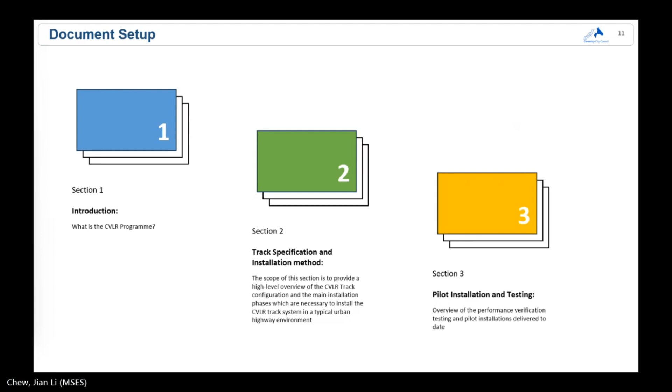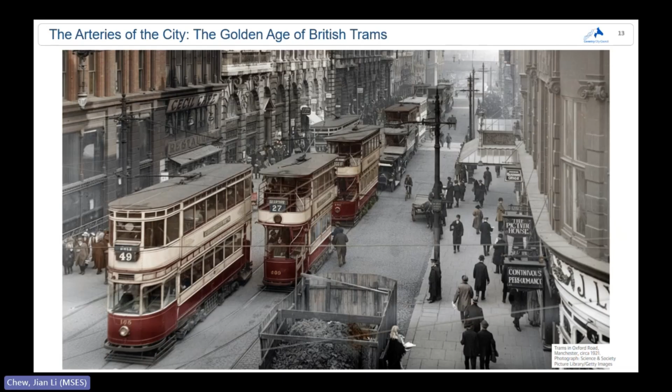Trams, believe it or not, are what probably created modern cities. It's what used to move people around in cities, and the UK really was at the heart of this innovation. Cities wouldn't have come to exist with their nature if we weren't able to move people efficiently around. Trams were at the heart of public transit. Cities were never designed for cars, and that's part of the problem we have today.

Excellent. No, I think I prefer to do it.

So what is the situation we find ourselves in today? Light rail in Germany, because it's retained most of its systems, has about 60 networks left around the country. France have been building aggressively, they've got about 30 networks. The UK, depending which ones you count as light rail, has up to 9 systems left. And unless something changes, we've just seen before Christmas that Leeds, the biggest city in Europe without a light rail system, is probably looking at years and years before they get one. We'll look at the reasons for this situation.

Just to give you an idea: if we look at Germany, those 60 networks moved about 4 billion passenger journeys in 2024. That's 11 million people that travel on such transit.

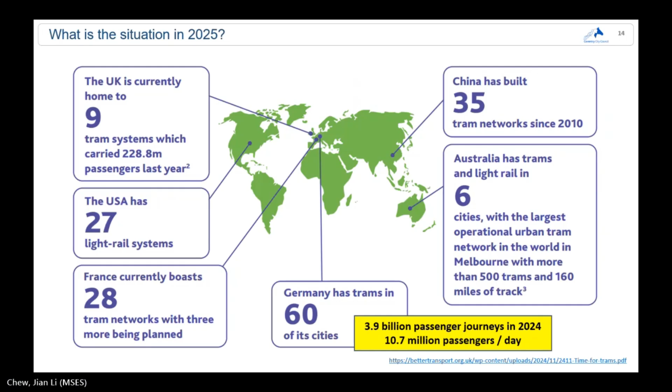So, to summarize the last point, the UK is really way behind other European countries and cities in terms of its light rail adoption. There's no other way of looking at it.

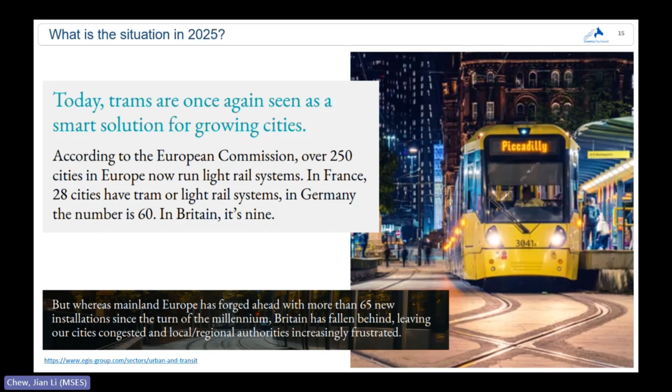Coventry had trams, as you might be aware, as did most other UK cities, but it lost them, partly because of the war, but more than the war - and I'm not speaking just specifically about Coventry - most other tram networks were abandoned purposefully, and it's not because the people didn't want them. The last tram to close in Glasgow had about 250,000 people in the streets celebrating the last tram journeys. So people always loved these modes of transit, and they still do.

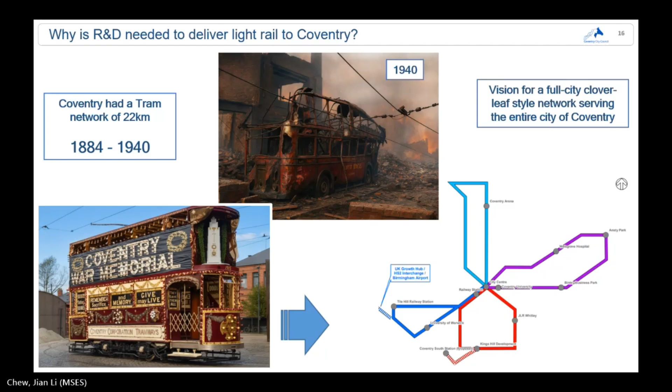Why are we trying to achieve this? We strongly believe, and this is backed by science and evidence, that a light rail implementation in a city can really bring significant advantages. When delivered in the right way, it's been proven over and over that it can really drive economic regeneration - the government invests X, private industry brings multiple factors of that. We've seen over and over that wherever light rail gets implemented, property around it increases in value more than anywhere else in that city.

In terms of performance, nothing comes close. It's zero local emissions and real zero emissions - well, nothing is truly zero emissions, but compared to a bus, it doesn't suffer from tire emissions. And of course, you're putting a lot of people on one single vehicle - by its definition, it is sustainable.

The final aspect is that when designed right, trams can really transform city centers and transport corridors because they are gentle vehicles. They are repeatable - you always know where a tram is. Seeing a tram come your way isn't like seeing a bus or a lorry coming your way. The certainty of steel on steel gives you the confidence that you always know where that vehicle is. That's why you see people walking in front of trams in cities, because that repeatability of motion and smoothness gives people confidence in being able to live very close to them.

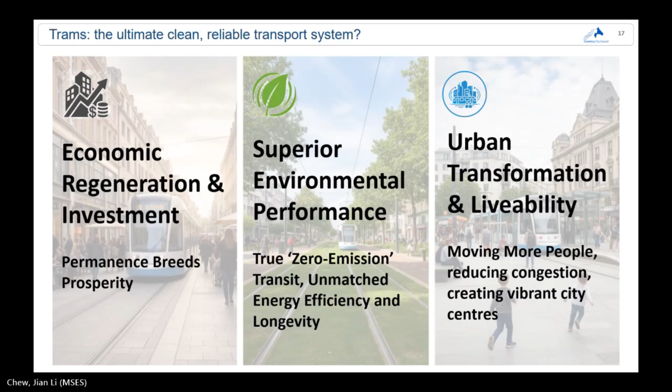So that's the vision, right? What has Coventry been up to?

Coventry has set up this project, and it's been quite a unique collaboration where government, academia, and industry have come together in a real collaborative fashion. I put that figure there, 30 million - it's expired. We've created more than 50 million pounds of research in this project, including this last phase.

And it must be said that funding is not Coventry's council tax. It's all R&D funding that we have been able to achieve step by step, very painfully, but it's reality. And this is by no means an exhaustive list of partners.

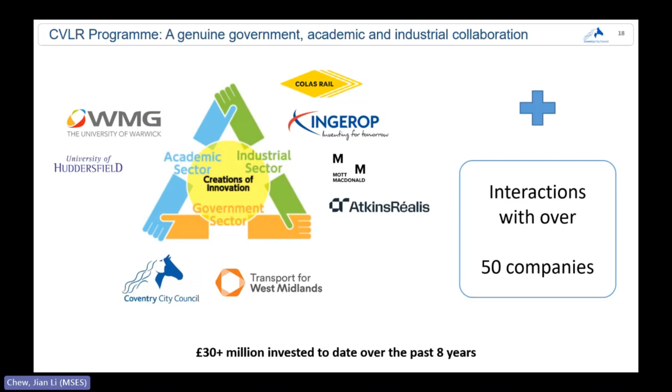I myself was one of the lead researchers at WMG to start with, and since then I've moved working directly at the Coventry City Council. Colas, Ingerop, Mott MacDonald, Atkins have been a few of our key partners, but in reality, and particularly on the track project, this program would have never existed if it weren't for so much collaborative and a lot of in-kind help that I've got from more than 50 companies that have supported and believe in this program.

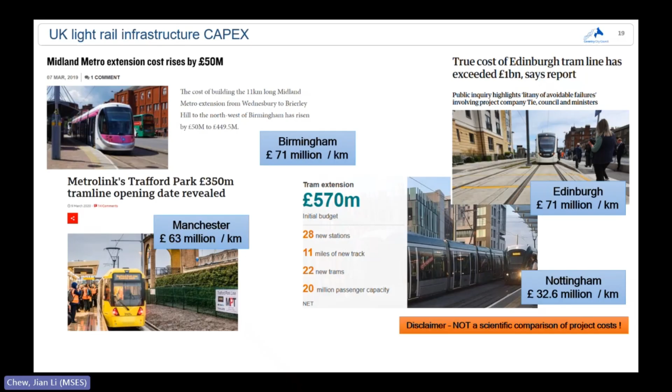And then there's another aspect to it. In the UK, there is this very aggressive push by the government and belief that they want these projects, these public transit projects - where most of them in Europe are delivered for the benefit of the people - so they are public investments for the people.

In our case, we want these projects to be self-sustainable in terms of the investment, right? We want them to have really solid business cases. And if anybody of you has been involved in these business cases, they are quite perverse in the way they are set up.

Just to give you an idea, right? If I'm building a business case for this light rail, and we're intentionally diverting traffic because we want to give priority to a more sustainable mode of transit, in my business case, I need to account for the delays I'm causing the traffic I'm intentionally diverting. And that's just one example, right?

On the other hand, we never account in the business case for the damage that private cars or so on actually cause on us, right? So it's a real fake business case because it doesn't account for all of these real factors, right? Nobody accounts for how many people we send to the NHS because of pollution, right? So that's why this business case is a fallacy in the end, right?

But without these business cases, these projects cannot exist because you're never gonna get funding for such projects. So that's the reality we live in, right?

Coventry City Council had been doing a lot of studies looking at what could make sense. And this is a number, and probably it was an aspirational challenge that they've given us as researchers at the university. They told us we could put together a business case for this early rough route that we have in mind. But it could only actually work if we have something that costs 10 million a kilometer.

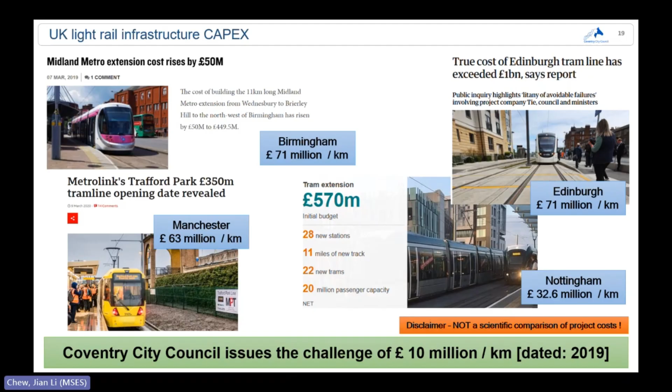How much does concrete cost, right? How much does asphalt cost? Why on earth are we spending 70 million a kilometer? Does track actually cost 70 million a kilometer? What's the cost of a tram? A tram is 2 million, 3 million. So why on earth are we costing these hundreds of millions on a project?

So that's where it started. And I guess the realization I came to is that track really is neither slow nor that expensive. By that I mean, you could probably build high-speed rail track at about 3-4 million a kilometer. That's the actual cost of track, of the final what we call the superstructure.

And in terms of speeds you can achieve, you can look that up. This was one of the biggest European-wide research projects in rail. Those are the rates you could achieve - 150, 500 meters a day.

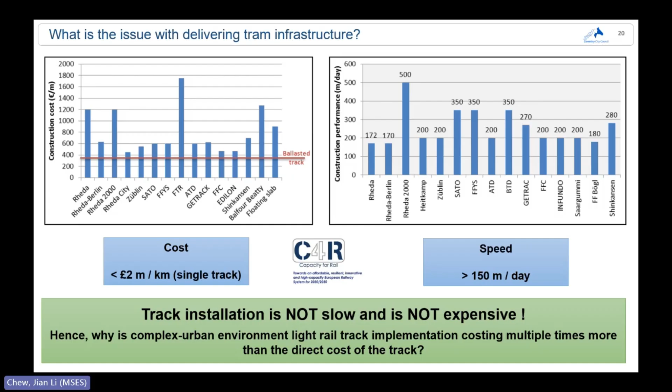But we all know that we close city centers for years when we are delivering track. So what's happening? I think you've already figured it out - it's not the track infrastructure which is the challenge. It is all of the enabling works necessary to put track into the real world. It's very obvious once you start looking at the numbers. Essentially, this gives the foundation to our project.

So we started to put some numbers around that. Manchester Metrolink: 400 separate utility assets had to be moved for just 1.3 kilometers of route. Those are 400 projects, all with their own complexity, costs and challenges. Plus, they are all interfacing with each other.

If we look at Edinburgh, you all know about the problems there. Edinburgh was approved by Parliament at about 350 million. It ended up costing more than £1 billion, for half of the scope, half of the route. Most of that was because of the complexity they met when they started digging and dealing with utilities. In Birmingham, 16 million a kilometer in that last section was just the cost of utility diversions. And that's actually net - it's not the real, full cost related to utility diversions and other enabling works. The number is even bigger than that.

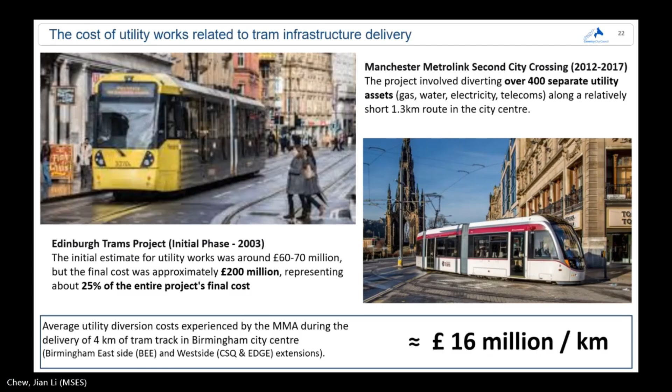And so this is what CVLR is all about. It is a journey, an R&D project to try to look at things differently. The industry is completely focused on subcomponents most of the time. It's completely fragmented and very niche in a lot of areas. So there's a few sleeper manufacturers, a few fastener manufacturers, a few engineering consultancies putting these together. Nobody actually has the holistic control or ownership of a full track system. Very, very few parties exist with that nature.

And if you would decide as a private entity to embark on a journey of developing a whole new system on your own, well, not a lot of people have done that and succeeded. There's a lot of R&D projects which stay there. So CVLR set out not on coming up with something better than what exists - we are never going to be better than somebody who has been doing something for 100 years. They're experts in that field.

But the aim of CVLR was to look at the real costs behind these light rail projects. The costs come from earthworks, from utilities, and the complexity that these bring about, the massive project durations we deal with. So CVLR track was designed from the ground up to try to give us a system which deals with the costs in that area. Does that make sense?

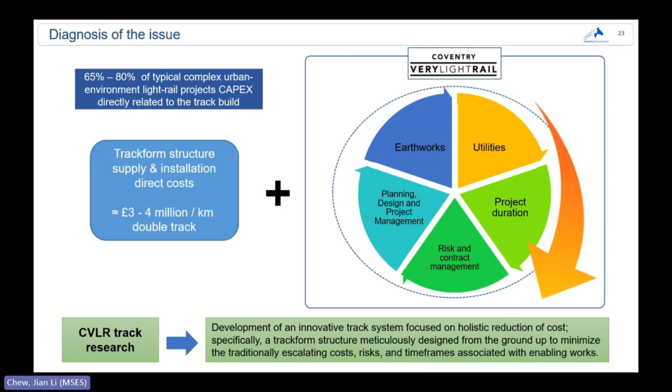So to go into a bit more detail on how we set about trying to achieve this vision, and then start going from vision to engineering, we essentially set up these targets for ourselves. We did set up a full program about coming up with a new vehicle, and I'm just going to touch on 2-3 slides on that today. The vehicle is a key enabler, and also we have to keep in mind that a lot of these decisions were taken in 2016, 2017.

The world is a very different place, and in a lot of ways, actually, the market is following our vision from back then. So some things are becoming easier than they were before, because battery technology, for example, is so much better than it was in 2017.

So the tram itself, it's a key enabler. As I'll explain, two of the main advantages that we sought to extract from the vehicle are mostly because of its onboard energy. If the vehicle doesn't, if I, as the infrastructure engineer, don't need to provide energy to the tram via the typical catenary, then of course the simplifications are very obvious. We don't have to build all of the overhead catenary. And also, for us track engineers, we do not have to deal with stray currents, which is a massive issue with typical light rail. I'll show a bit more on that.

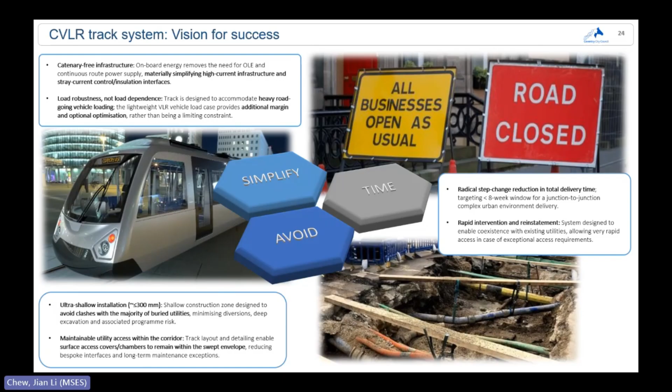As I mentioned, today isn't really about the vehicle, but just to give you a snapshot, that's the vehicle. Again, the project looks at trying to extract advances in technology, mostly happening within the automotive world, and bring them over to the light rail industry. By that, I mean two key technologies which we are really exploiting.

One is battery technology, and the other one is autonomous driving, autonomous control technologies. A light rail project, the light rail industry would have never had the capacity to innovate in these areas and actually drive these technologies forward on its own. But of course, billions are being put into these technologies by the automotive world, and we can carry over those technologies.

Such a sized tram could never actually exist economically if you are depending on drivers. It's the reason why you see double-deck buses driving empty all day, but we still keep buying double-decker buses, because the driver cost is such a significant aspect of OPEX that it makes much more sense, unfortunately, to pay 30% more fuel and buy buses which cost probably double when comparing a double to a single-deck bus. But because we fill it in rush hour, it still makes economical sense to do it that way.

And same thing with trams. If you look at the average occupancy of trams around the UK, you're talking about 25% if you look at the full data - how many seats we have on all the journeys and how many seats are we filling? 25-30%. That means we're packing trams in rush hour and they're running empty the rest of the day. But it still makes sense to have that model because of the driver cost. I'm simplifying some aspects - nothing is black and white in the world, but that is my understanding of it.

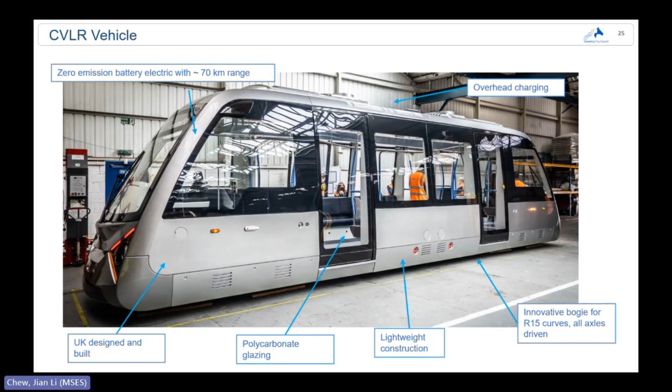The other aspect is onboard battery. As you see, that vehicle doesn't need any catenary. It's 8-year-old technology, and with a battery the size of a Nissan Leaf, we can do 70 kilometers of running. So why on earth would you need to put in catenary? And that's 8-year-old battery technology - we're not talking about what is available today.

So that's the vehicle.

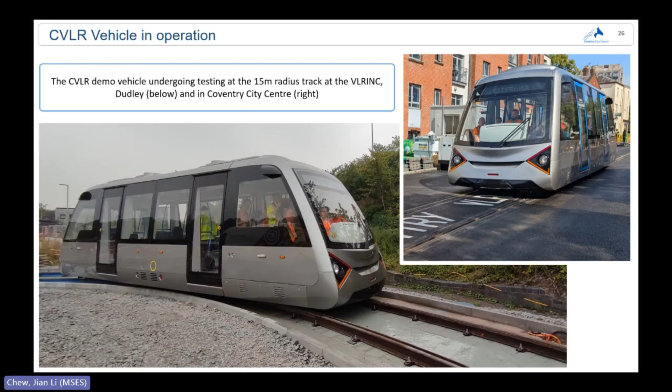For the project managers amongst yourselves, I thought I'll give you a snapshot of this, because this project - unfortunately it wasn't the case that we had a very rich councillor who stole, I don't know, 10 years of council tax and came to us and said make me a tram. This has all been very, very hard-fought funding, which we got step by step from the DFT. And the only way we were able to achieve this amount of funding is because we had to build a lot of stage gates into our process. DFT itself did not know how to deal with our project because of the level of funding available here.

The only way we were able to do this is - of course this is our vision, but we're going to deliver this success first. If we achieve that, we'll move to the next. The only challenge with that, of course, is that in itself requires a lot of work. Every stage gate requires a lot of work just to be able to pass, and it of course hinders how you can build collaborations, especially with industry. People would be willing to invest, but if you only promise them the project will only exist for the next 3 months or 6 months, well, people reconsider if they're going to come along with the journey.

It would have been a very, very different picture if at the very start the UK government put the money in a pot and let us use it. This project would have probably been shrunk into half the duration and probably delivered more. But it's the reality of the world we live in. We started with very, very little money back in 2017, 18. And that period was essentially going through this story, which I have been telling you. We really wanted to convince ourselves that we had a strong foundation upon which to build.

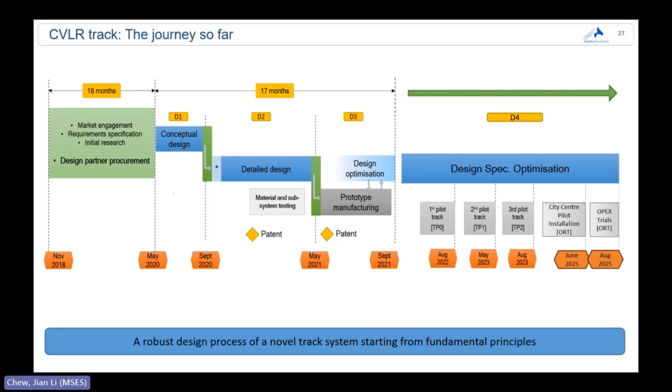September 10, 2021 is when we delivered the first full-scale prototype demonstrator of the system, which convinced the DFT to really invest some significant money into the project to allow us to start building the first pilot projects. Since then, we have delivered 4 pilot projects, and I'll give you an overview of these and the reason why we had to build so many and the incremental learning we took from one to the other.

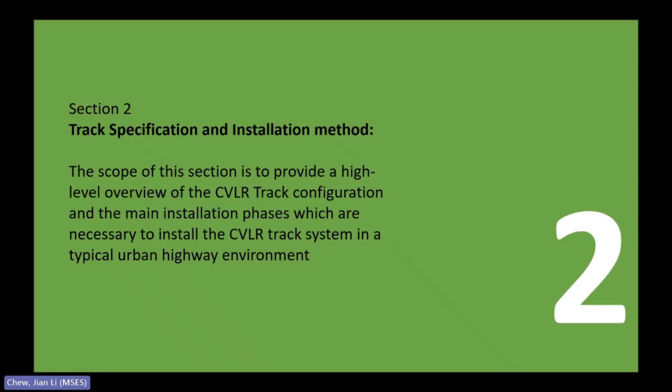So that's the first section done. We're going to look at the system now and the testing as I've been highlighting.

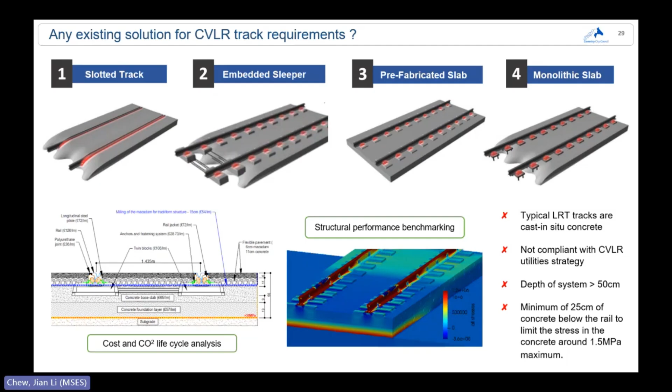The first thing we did, we really wanted to make sure there isn't any obvious solution out there we can actually exploit. Why redesign the wheel? So we embarked on a journey of benchmarking. We built up FE models, cost models, carbon models, comparing basically every track configuration we could get our hands on - the classical one, embedded sleepers, slab-based track systems, cast-in-situ systems, top-down, bottom-up, and so on. The sad answer was that none of the existing track configurations gave us what we needed.

This is what a traditional track looks like, especially the depth. No project is alike, and no section of a project is alike, but this is what we're typically dealing with. The top bit, the last 150 for the rail, and 250 millimeters roughly underneath it is the main structural element. But then we typically need - and that blue arrow requirement, which comes with the vast majority of track specifications, is the biggest headache - they require a foundation having 120 megapascals, for the engineers amongst yourselves. And that property never exists in our roads when you dig to that level, or at least you cannot assume you're going to find it, which is even worse.

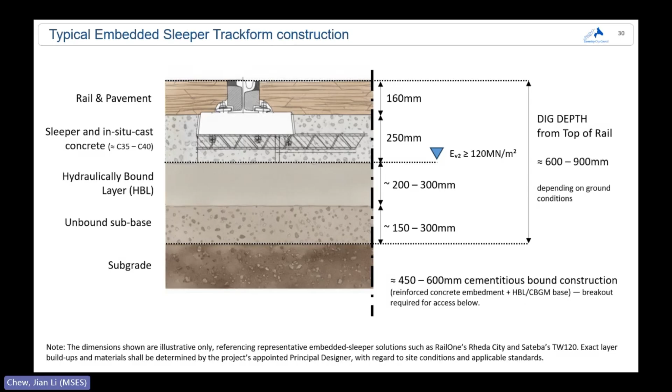This is what we might call the state of the art in track construction looks like. You have to set up a clean foundation which achieves that specification I've just shown. Then on top of that, in an urban environment, we typically put sleepers. Why sleepers and not slab-based like high-speed rail? Because sleepers allow you to have continuously changing alignment - with slabs, it becomes much more challenging. You put the sleepers, align your rail, and then pour the main structural slab, which ties all of those sleepers together, and that's your main track constructed.

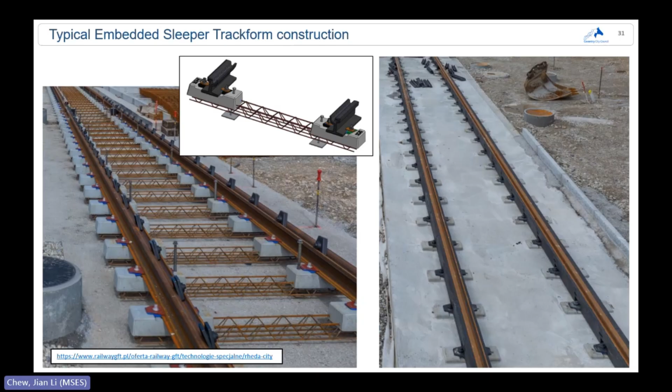What are we doing differently on CVLR? These are requirements which are quite unique to our project. If you would go around and ask Birmingham, Edinburgh, etc. for their track specifications, these requirements wouldn't exist. They would never have a requirement that the track system must only be 30 centimeters in height. Why would you create such a constraint for yourselves, unless you're in a tunnel and cannot be higher than that because the systems won't fit? But for Coventry, that's probably one of our most important requirements - we defined that 30 centimeters to solve the issues I had been highlighting before.

We did look at the rail. We did think about trying to come up with our own Coventry rail, but that on its own would have been a much bigger project than the funding and resource I had available, so we had to leave that alone and just use standard rail. Could we have come up with our own unique shape? Maybe, probably, but we just don't have the funds to deal with that size of project, and all the logistics and supply chain issues that come with having your own profile, which you'd have to roll and stock. That meant I had 10 centimeters of depth to play with - if you take 30 centimeters, remove tolerance for real world buildability, and remove 150 mil for your rail, you're left with 10 centimeters for your structure.

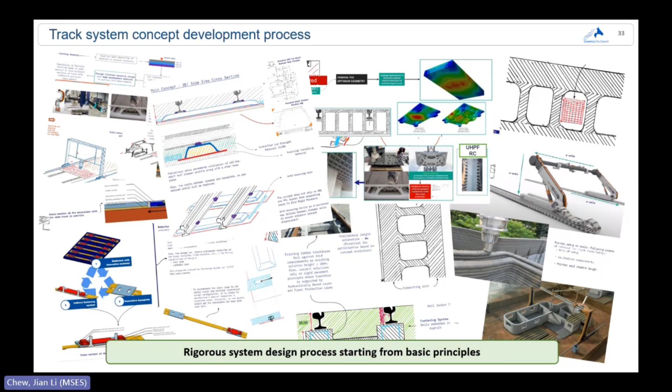This was probably one of the most fun bits of the project. We really wanted to avoid coming to a room like today and somebody telling me, 'Did you think of this?' We wanted to make sure we tried to think of anything and everything and explore these ideas. We looked at carbon fibers, aluminum sandwich panels, 3D printing on site, and so on. We built a very detailed decision-making matrix, which all stakeholders signed off on before we started, so we could properly value these concepts.

And what we came up with was this. I'll jump through these technical slides because photos will make a lot more sense. You could compare the existing state-of-the-art track to what we came up with - essentially a 300 mil realistic system. I say that because it's actually only 260 millimeters for the track itself; we left another 40 mil as real wear tolerance. So the slab is 105 mil, the rail is 155, and then 40 millimeters for a bedding layer.

As you see there, in the absolute perfect world, which we engineers love to work with on computers, you see where the utilities are. They're very far from our track. In reality, of course, it's not always the case. But that's all to scale, and that's where utilities should be. Telecoms should be at 450 mil or deeper.

Electricity can be at 520 mil, and gas should be at 750 mil in the highway. And so that's where the 300 mil came from, right? That's a requirement which we made up. It's something I decided on back in 2018, to give us at least a space to work in, and as healthy a distance as possible from where utilities shouldn't really be. We know that especially for telecoms, they can be much shallower than that. Nobody's controlling where these people are putting their utilities, and it's very common to have utilities which are shallower than that.

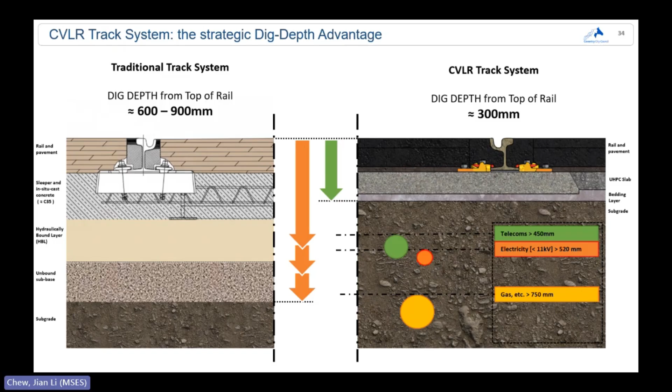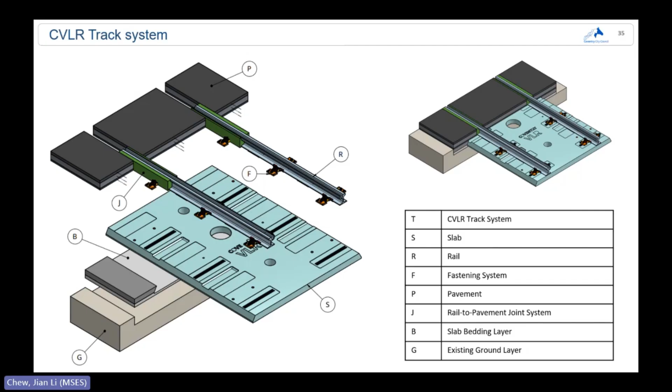But there are options, especially for telecoms when they're shallow. We can very easily slew and lower. That's the system that we came up with, and instead of trying to explain this technical drawing here, I'll explain the elements in the next slides. The main structural element is a slab, which fastens the rail to it. So we have a mechanically fastened rail, beyond it being embedded in the pavement, which sits on a bedding layer on top of whatever ground we find at 300 millimeters.

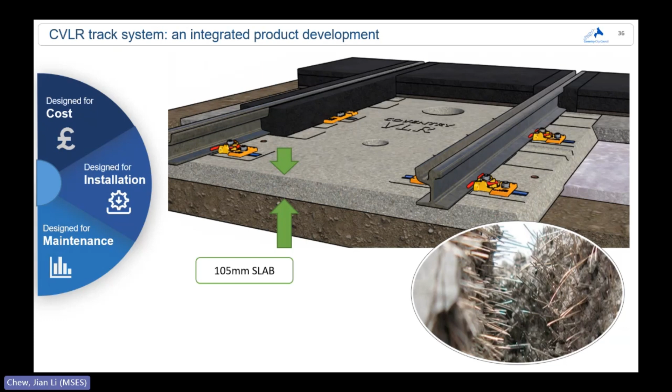That's another angle of the track. And what you see there is a section of the slab, and I put that on purpose. So how do you achieve a slab which is just 105 millimeters? We could only achieve the requirements we needed by using a class of concrete termed ultra high performance concrete. Has anybody come across or used it before? There's only one nodding, and there's a reason for that.

We are really behind the curve in the UK when it comes to the utilization of UHPC. Of course, UHPC isn't a brand, it's a family of products, and its performance can vary greatly, as you see there. Its elements are nothing special, there's nothing miraculous about the product. It's a cement-based concrete, we've got aggregates and filling powders.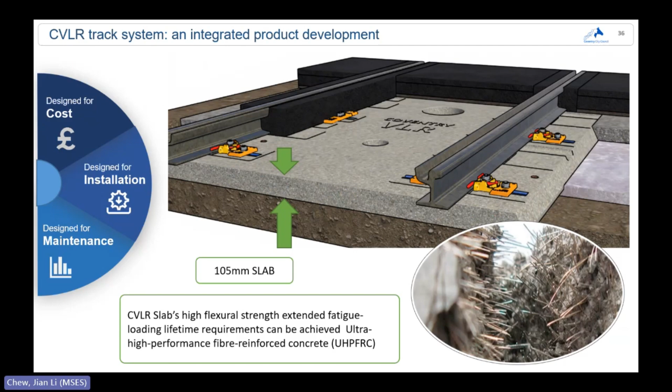What is unique is the use of these very fine steel fibers. If I go back to that image, you could see those steel fibers, 0.2 mil in diameter. It's what gives the flexural strength and ductility to these materials. Comparing it to concrete, you could see on that chart we're talking about compressive strength of 150 megapascals and above, compared to your classical 30, 40, 50 megapascals of products.

Yes, you said the diameter is 0.2 mil? Yes, needles. I've got a lot of holes in my fingers from handling them, yes.

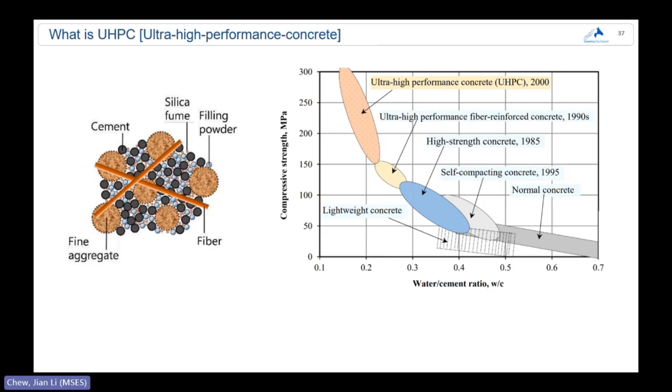Another aspect: it does use double the cement of normal concrete, which means if you look at a ton of UHPC compared to a ton of normal concrete, we're probably doubling the like-for-like comparison in terms of sustainability of the product. It's got a lot of cement in it and a lot of steel in it. But the truth is we're using a lot less material. So even when we compare like for like in terms of net material usage, we still end up with a sustainable answer.

If you start taking into account the reduction in material handling and all of the lorries involved in digging and so on, we're currently working on a full sustainability analysis of the solution, but I'm pretty confident we'll come up with a very pleasant answer. That's one of the main conclusions: UHPC, when used in the right ways, is a magical, fascinating material.

Out of this project, just out of curiosity, HS2 has actually implemented UHPC. The parapet sections on the Colne Viaduct project are UHPC. It solved a massive, monstrous headache that they were having. And actually, that was a direct result of Coventry VLR. I was giving a lecture similar to this a few years back, and there was one of the chief engineers responsible for that project.

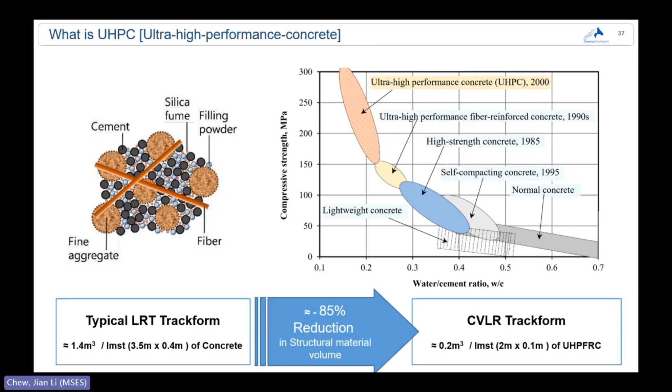I mentioned before the requirement we set on ourselves: we wanted a system that enables us, with very few slab shapes, to achieve essentially an alignment. And this is how we achieve it.

We have casting channels set in our slab, which means with one singular slab shape we could achieve basically any alignment, because of the variation of either rotating the slab by slewing them a bit, shifting them, or cutting a section of the slab.

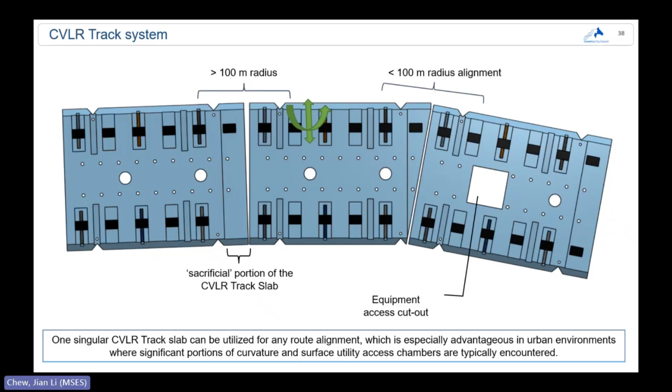So now I've got 10 slides to show you how this happens in practice, and to explain a bit more on the subsystems involved.

It's actually all photos taken last summer, the majority of them not far from here in the city center of Coventry. The first stage is a classical highway process: milling of our existing highways. An extremely efficient process - I think it took them about 3 to 4 hours to mill about 220 meters of road.

Down to 300 millimeters. It then took us a week to deal with very small issues we encountered, and that was lessons learned we'll be taking forward in the next phase of the project. But in itself, an extremely efficient process.

And in theory, if we get all our surveys right, if we know where everything is, etc., the next day you're ready to start laying track.

What were the issues? I'll talk later, it's a detail - but for example, there was an electric cable which was completely marked as off, but when you're milling and you cut it at 200 mil depth, you have to stop and investigate. That means the process must stop. Other aspects related to design too, but we can discuss that in detail later.

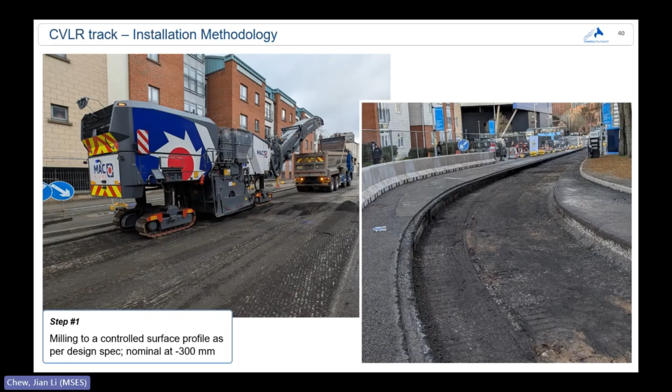Next step - this is really just because we're still in an R&D phase and learning. We're taking a lot of readings and measurements on site to verify our learnings.

This is what's termed an LWD test - we're checking the bearing capacity of the ground. We're always getting much higher data than the 2.3% CBR expected in such a trafficked highway.

What you see up there, that's the preparation for ducting for drainage of the rails. That's the only localized location where we dig deeper than 300 mil. Of course, that's unavoidable to provide drainage for the rails.

And down there, that's a very important detail - I've mentioned the ability to retain manholes within, or between, the rails, or hopefully shift them out - but really try to reduce as much as possible the cost of moving these manholes out of the way for no reason.

Of course, if there's an access chamber, for example a telecoms chamber which we know needs frequent access, we would never leave it between the rails - it doesn't make sense. But if we know it's a wastewater access chamber, we survey these out, and the vast majority of them are basically welded shut.

They've not been opened for the last 20-30 years. So we're saying, no, we're not going to spend taxpayer money to move these chambers out of the way for no reason. If somebody in the future wants to come at midnight and open that chamber, guess what - the tram wouldn't be running anyway.

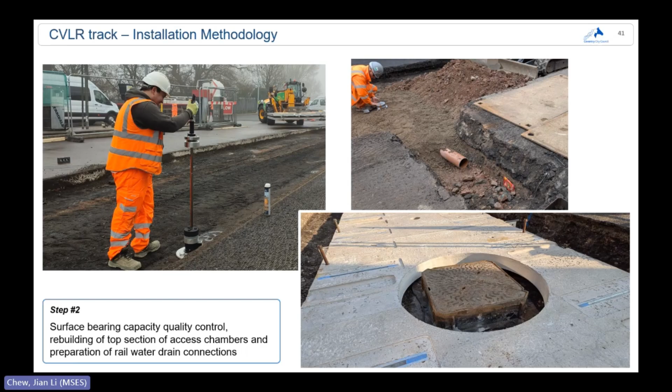Next comes the slabs, just lowered into the chamber. A very interesting side effect of using UHPC and having a lightweight slab is that you can manage them using small equipment. That 14-ton wheel digger was the only plant, besides a small dumper, that we used to build 220 meters of track. There were no heavy lift cranes or lifting equipment, just that one singular piece of kit, which really brings a lot of efficiencies in terms of cost to site.

The slab just gets laid on whatever foundation we find, at 300 mil. There was no preparation more than just rolling the ground up, really, to roll out the disturbance that is created by the diggers and so on.

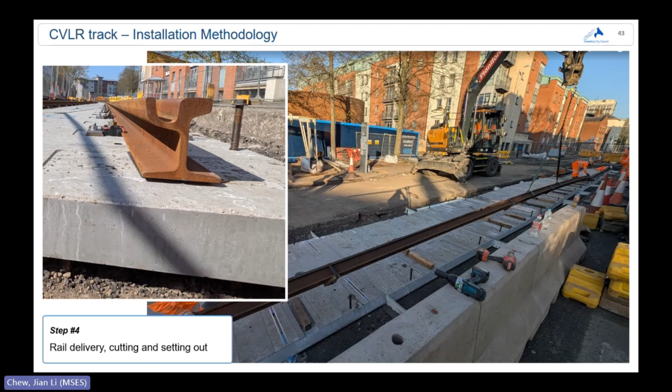Then comes the rail. We bring the rail - this is classic light rail technology. We start aligning it and weld them, again with state-of-the-art solutions here, automatic heating and control of the welds and so on. But still, as always, small changes in these projects when you're innovating - as soon as you change a factor, you're creating headaches for yourselves. In this case, it's a completely standard process, but we still had to innovate with Pandrol.

Because in this case, the weld is sitting on top of a slab. Classically, it sits between sleepers, and between sleepers there's as much space as you want. In our case, the weld sits on top of the slab, which meant we were really constrained in terms of the space between the rail and the slab. Hence we had to control what is termed the collar - the extra bleed of material around the rail. Just that small detail in itself was an R&D project we had to carry out, and there's plenty of examples of that.

Do they cut on site? No. Essentially, we design everything beforehand, so we know the exact schedule of the slabs and how they're going to arrive. The ones that needed to be cut were only 2 different variants, so essentially we had 3 slab types. We get the right amount of slabs having the right shape on site - it's more efficient that way than cutting on site.

That said, we did cut a slab on site. When we worked on the alignment from both ends coming to the middle, the last slab had to be modified to fit exactly. We just took it on, cut it in 15 minutes, slotted it in, and proceeded. That's the flexibility that the project affords you. If you're bringing expensive UHPC on site and having to cut it and throw it away, it's not really an efficient way of dealing with things. But the ability to do it gives you a lot of flexibility. So it's a hybrid approach we were taking, because it's the most cost effective.

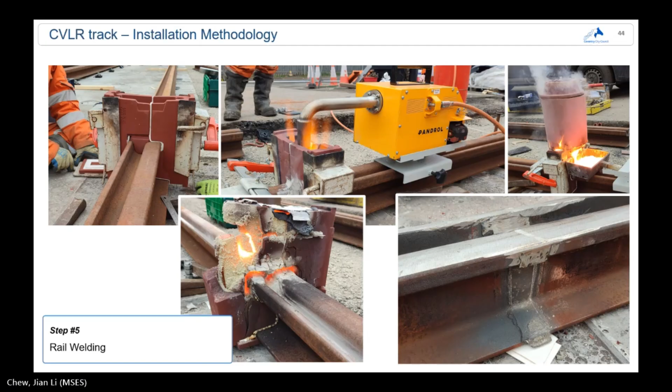That's another first of a kind - another collaboration project with ACO, specifically designed for the project. Again, completely in-kind development - most of these technologies have been developed with partners who believed in this project and have come with us on this journey. The full development, testing and certification to E600 was done by ACO, and they're receiving a lot of interest for this product because it solves a lot of headaches others have.

I wanted a product which sits exactly between the rails as one integral single unit. Typically that comes in separate sections - a middle section and the sections which go under the rail. We solved that by having... my point was that the rail is a structural element, what sits underneath it doesn't need to be structural. So we've got these shelves, water shelves that open and sit under the groove to collect the water. We open them after installing the main section.

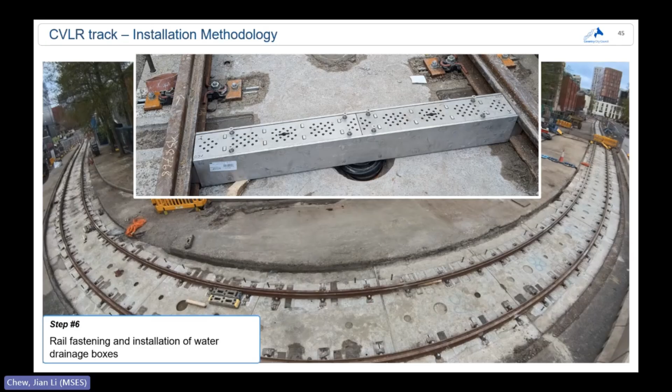If anybody's interested in any specific detail, we can talk afterwards and I can send you any detail you want. Once we have the slabs and rails positioned, then we bed them in place - again, this was another innovation project. Slab bedding materials or grouts aren't anything new, but actually the product we've used here was a new development for the project. It was 8 separate ready-mix series of tests before we were able to come to site.

We developed a product which is cost-effective enough to be utilized freely on site. These bedding mortars are typically quite expensive products which need mixing equipment on site. But we said, with CVLR, we have the trench available to contain the bedding material.

Rather than going the high-speed rail way of having to shutter your slabs to contain your bedding layer and control the flow, we wanted to come up with a product which is affordable that we can use freely, avoiding all that preparation. That's what we came up with, a product flowable enough to give us the functionality we need, that we can get delivered to site as ready mix.

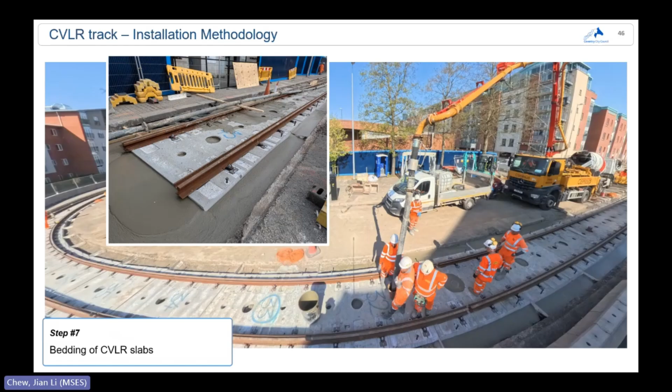That site consumed about almost 100 cubes of material, which we bed in a day and a half. So 220 meters, we were able to get bed in a day and a half. The next day, you could operate the tram on top of the track. That gives you an example of how careless we can be with the preparation of the foundation—basically zero preparation.

That is not the case when you're putting in other slabs with other systems. Typically they try to build perfect sand beds on which they place slabs. If you look at Birmingham, when placing a section of slab track, it was quite comical seeing them lifting certain slabs up and down 3-4 times, grinding and shaving away and adjusting the foundation until they got there.

In this case, we just spread the slab where we need it, and then pump the material and it flows. Again, you can't go on site and just assume it's going to work. We had a bespoke testing site set up. We were getting the material pumping, and I can assure you the first trials, the slabs were floating and swimming away, literally—even though we were using a material half the density of those slabs. We're using an aerated concrete to increase sustainability in that solution.

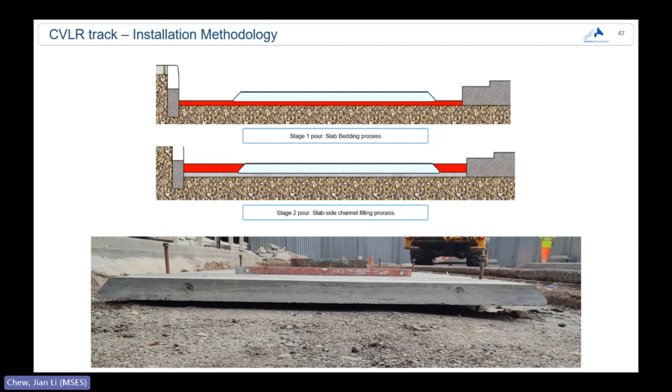Slab to rail interface, probably the Achilles heel of most light rail systems. It is the area which gets bombarded. This is an area of key innovation, and we're very proud of this—it's looking like something very interesting. I can speak more about this afterwards; there are some details which are IP protected for the time being.

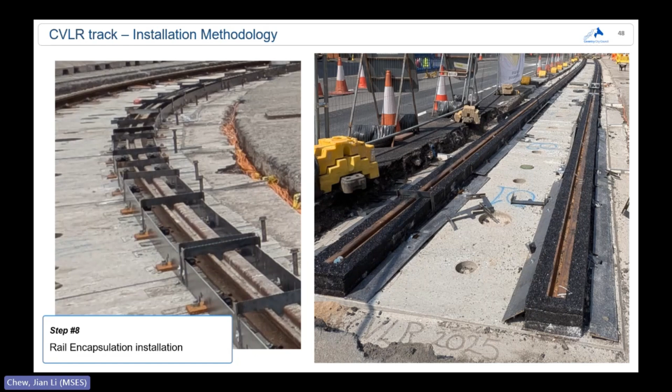But then the final stage is just building the flexible asphalt pavement around that interface, as you could see there.

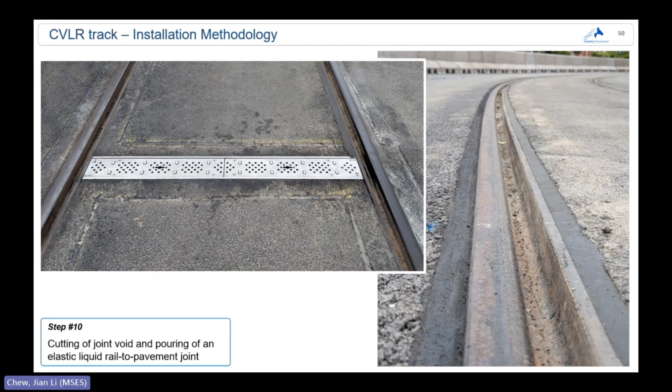Now what you're seeing there, those are timestamp photos—I'm not making any of this up. March 17, we took the highway from the city. There were some enabling works before that, but that was mostly nothing to do with CVLR. The project—Coventry City Council wanted to remove a central strip which was in this highway, and that central strip was removed for reasons nothing to do with CVLR.

It had something to do with the city wanting to do other projects, MotoFest and elements like this. So we joined the projects for cost efficiencies, and that's an element where actually we were exploiting CVLR funds which come from DFT to better the city, rather than what some people assume—that we're using the city's money to do the project. Nothing could be further from the truth, even though, interestingly, some people go around the city spreading absolute lies about the project, which I find quite fascinating.

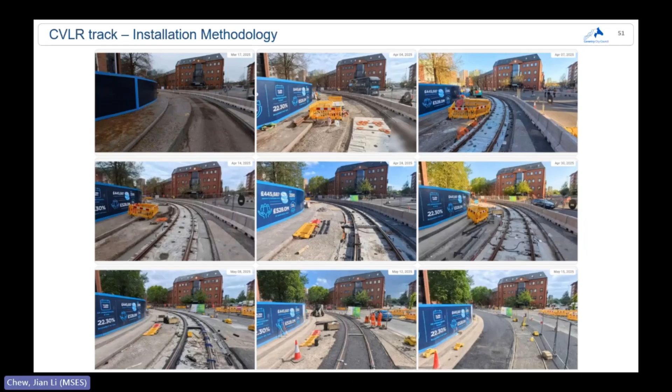March 17, we took the road, and May 15, the track was constructed. I'll show you something even more fascinating than just the construction of 220 meters in about 8-9 weeks, depending how you count it. We did actually allow a lot of slack time between the processes—this was not planned and programmed and delivered F1 style. It was essentially the first time the team building this was dealing with the system. This was the first time Colas Rail was actually building this track; they were using the site as a training site, effectively. So we allowed a lot of slack between the different processes to make sure delays could be absorbed in the program.

The last section is going back in time a bit, explaining how we sought to build a body of evidence to prove to people that we know what we're doing.

Essentially, we follow the classical V-model system development—a system developed by NASA. If you're new to it, it allows you to focus your energy on where you need to. You break down your system into subsystems, then components, then materials, and test only where you need to. So if I'm using a component already in use, I don't test that component. But when you're putting two components together for the first time in your project, even though individually they might work, you're responsible for testing that interaction.

And so that's what the project involved. As you might see, we tested sub-assemblies, and then that gave us the confidence to go to full slab, and then the full slab was tested lab-based in universities. And then what you see down there is the testing of the slab bedding process.

Fastening system certification - of course, whenever we have standards, that's easy, you follow the standards. It's much more challenging when you don't have standards. And believe it or not, there's no one comprehensive standard for track infrastructure. So a lot of these tests we had to come up with ourselves and develop these test sites, to build confidence in the system.

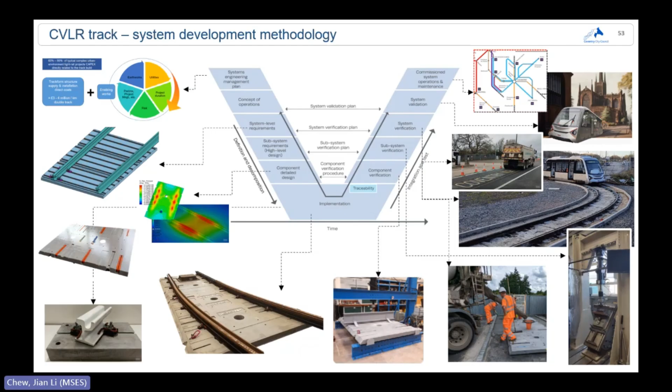As you might imagine, moving from detailed design, virtual modeling - FE modeling of both structure and vibrations - have been extremely important. For manufacturing, we even had to set up the first manufacturing of the first prototype ourselves. What you see there was during my COVID, whilst everybody was at home and the university was empty. I got special permission to build a bespoke manufacturing precasting site to cast the first prototype of slabs.

If we didn't deliver those first prototypes, the project would have died. When I started calling around the UK for people to cast the first full-scale prototype, basically nobody opened the door. So I bought an agricultural mixer - they used that mixer to mix animal feed. I changed its gearbox and motor and cast UHPC, and that gave us the first slabs and allowed us to proceed with the process.

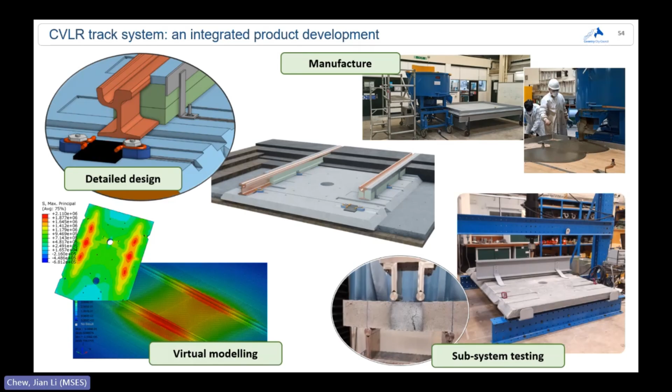The process is already quite mature because these pilot projects have given us the space to learn and then implement lessons learned. And hence, even though we're still in an R&D phase, we're already quite mature in a lot of ways. So you could see how the slab evolved from first principles to where it stands, similar in some aspects but quite different in others. What you're seeing is an evolution where we're either implementing changes to optimize for cost or implementing lessons we've learned from test sites.

And we're now very close to having this product as a commercial off-the-shelf system. I'm extremely proud to say that the system has now been taken up by Vossloh, one of the world's largest railway component suppliers. For the next pilot project, they're going to be the supplier for the system, which means this structure is going to now have the visibility of practically all of the world as they go around showcasing the system. There's something quite to be proud of, I suppose, for the project.

These are the four pilot projects we've delivered to date. The first one was just a site at university - it was just a parking area, but it allowed us to really learn a lot. We built a replica road, then we dug it up and built a track in it, putting in a lot of combinations of materials.

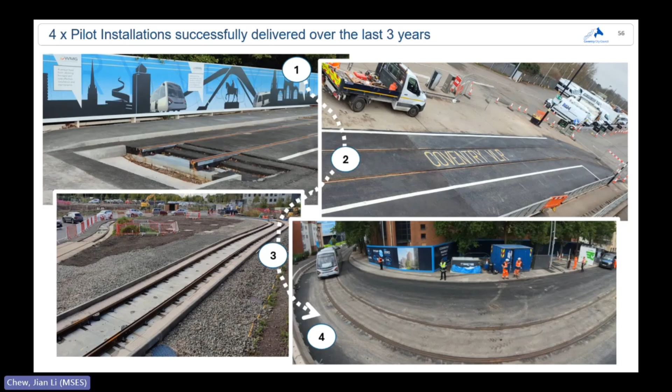Just some details on what I've said - that was the first site. Again, it gave us this ability to start learning. If we didn't have the site at university, you get stuck. This site was effectively built by myself and two lads from the council's DLO, direct labour organisation. Coventry City Council has their own highways maintenance team, so they gave us two lads and a 3CX, and we built this in a summer, making it as we go along. But it provided so much learning and so much confidence to people that came along in the next phase to help us move along.

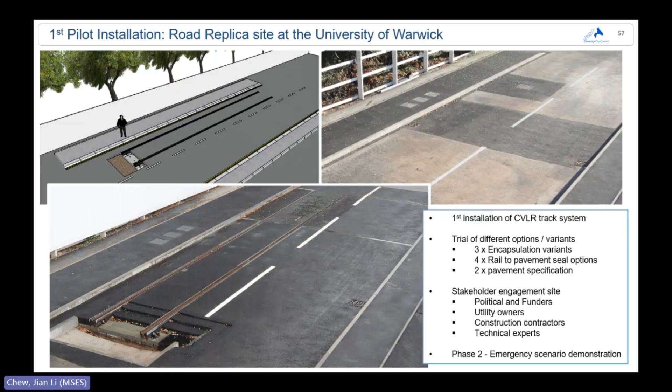That was the second phase. You see it there before building, and that's how it gets loaded by lorries.

This has been a fascinating and very painful part of the project. We did set up a state-of-the-art, and I use the words on purpose, high-frequency sensing setup. You would assume that if you're buying high-frequency sensors and data loggers, there's also software to visualize and analyze all of this. It's been an enormous project learning together with the project partners how to deal with such high volumes of data.

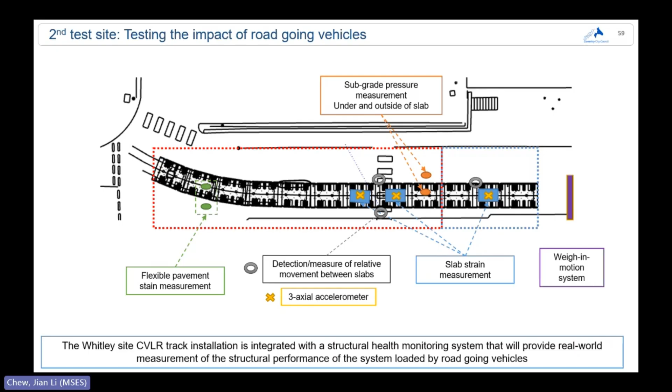But we've developed quite a novel system now, which is giving us really amazing data. I think I have a snapshot of some of it. That was the third site.

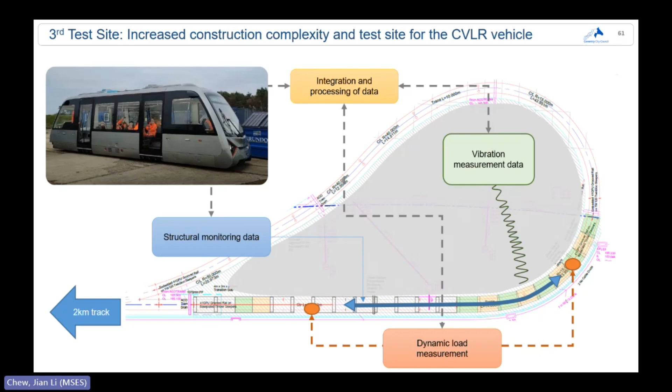This site allowed us to really learn what the vehicle is doing to the track—vibration impact. Here we measured the vibration signature of the system, and of course all of the lateral loadings and so on the track.

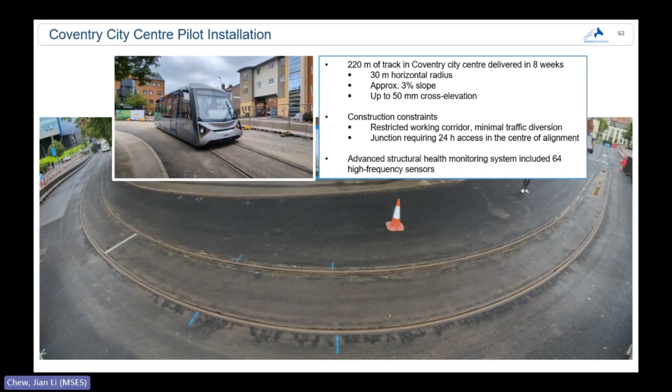And that's—we've already mentioned this, I skipped about—there was increasing complexity in terms of the geometry we were achieving from side to side. We started by straight, then a section of curved, then we increased vertical and horizontal curvatures, and this was what we introduced here: super elevation as well.

This is what I mentioned before. It is one thing just building a section of track, but this shows what CVLR is able to do. We were able to go from a highway to having an operational tram in 8 weeks. That is probably a world record, even though it is just a test site, right? And that's only possible because of the complexity reduction the project sought from the start—the vehicle having onboard energy and not having to talk to anything on site. You don't have to do all the typical testing and handshaking between all the various systems.

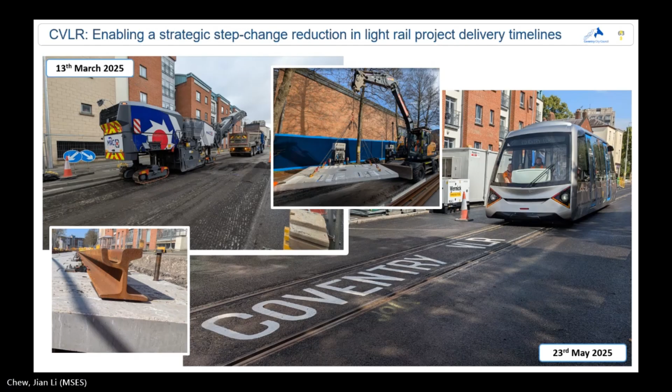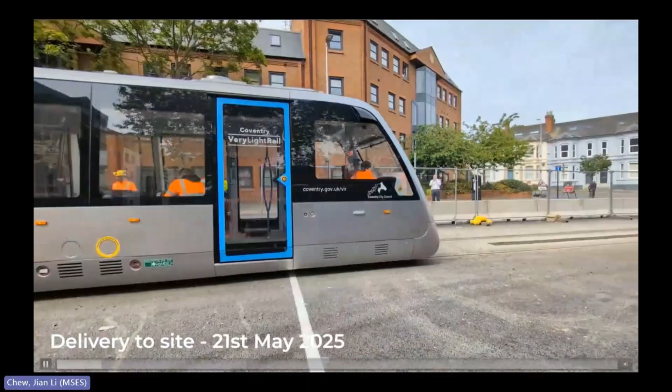Got a 1-minute video, and then we're almost done. That gives you an idea of the advantage of being such a small vehicle. You can bring it in on site and take it away quite efficiently.

Well, it was absolutely great. And it was really small. Sleek, and quiet—I thought it was good. Very comfortable, very smooth. It went quite fast, and we sat behind the driver and saw what they were doing—that was really fun. It was fantastic, very smooth, no noise, really liked it. It was a little bit fast at the start, but I really liked it. Extremely impressed—light, airy carriages, very quiet. Very enjoyable, so smooth, so quiet, so fast. It's like getting people from A to B in no time. It's the best thing Coventry could ever wish for. It's fantastic.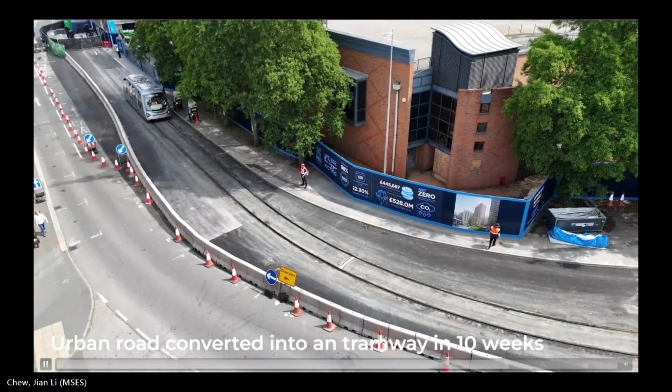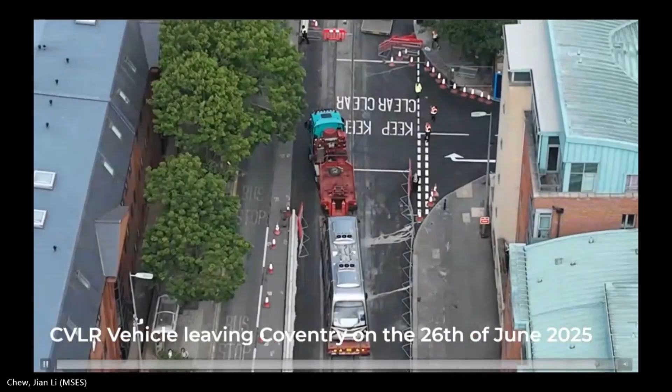So yeah, sadly the tram had to go away, but the test site is still there and is still extremely valuable because, of course, we have another structural health monitoring system implemented. We've got 64 sensors embedded in that track, yielding us every day more and more data and evidence on the performance of that track.

A lesson learned from this pilot installation: we were extremely surprised by the amount of positive feedback we got. There seems to be quite a difference between the online world—wherever there's an article about CVLR in the local newspapers, you'll get the typical 15, 20 comments, all ridiculously stupid, like 'Councillor O'Boyle putting money in his pocket,' nothing could be further from the truth. But what the people on the ground really believe was fascinating.

The amount of people stopping me and asking, 'What's going on here? Trams? Amazing. When is it going to be ready?' I was almost startled by it all, because what we've been reading in the online comments in recent years is so different from what the people in the city actually believe.

So yeah, I put only this because it's one of the comments we typically get: 'This looks like a bus. Why not just put buses?'

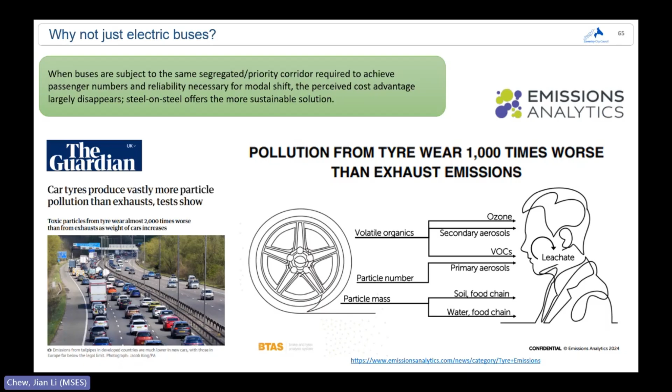Then there's the things we don't really care about - we don't care about the pollution we're causing to this world. We just accept it, right? It's called motor normativity. The pollution that comes from cars is something we have to live with, but in reality it's killing us. But so be it. Because if we did value it, we would put a lot more pressure on politicians to put in such mass transit systems.

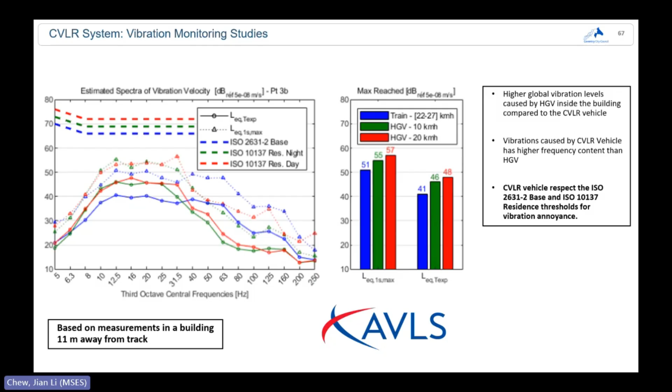This is just a snapshot of the studies we're doing in terms of vibration, again a very important element. We've got very promising results coming out of that.

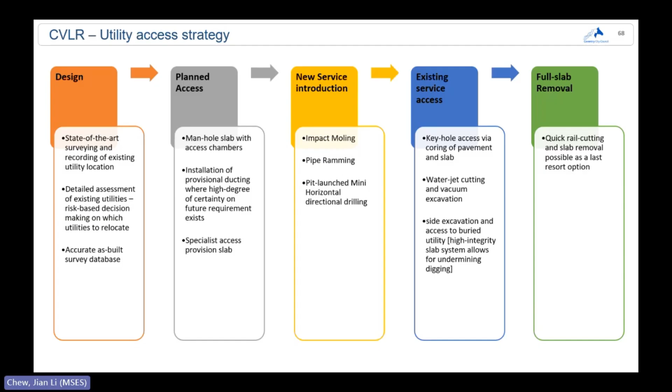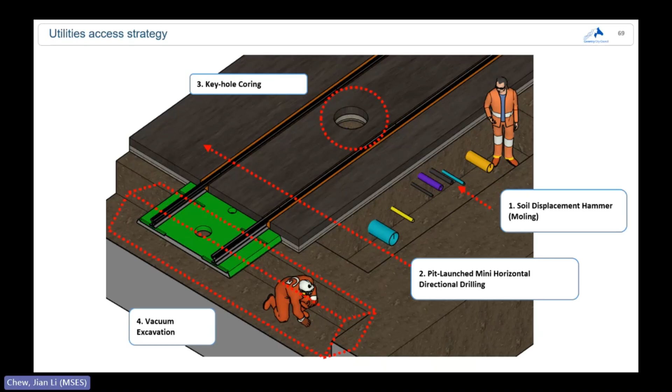This last section was looking at utilities. Utilities are probably our most important stakeholder. We've been working with them from the very start, developing a really detailed and holistic strategy for how to deal with utilities. It's a mix of technologies and techniques that we're putting together to make sure we've got a toolkit that enables us to essentially leave the utilities where they are in the vast majority of instances. I'll be presenting most of the outputs of this utilities work at the annual conference of the Utility Trenchless Society in a few weeks' time, if this particular area is of interest. We've put a lot of work into this area, and this is just meant to be a snapshot of all the work we've been doing.

What you see here, for example, is just the emergency scenario case - what if we need to remove a track? In a case of emergency, we were able to basically remove a section of track in less than an hour. Now, this is only meant to be an absolute last-resort scenario activity, but again it's just to build that body of evidence.

We also demonstrated, for example, what would need to happen in the future when we're replacing rail. We've demonstrated that we have essentially one of the most sustainable methods of replacing rail compared to what other cities have been going through, spending tens of millions replacing rail - look at Sheffield and so on. Some of you might have walked this route.

This is what comes next - this is the final end of this R&D program. It is a full system, will be with shared traffic, we'll have double tracks, switches, turnouts, and variants of the track delivered. The aim is, at the end of this, to have a real evidence-backed specification for this novel system, which anybody can exploit and use.

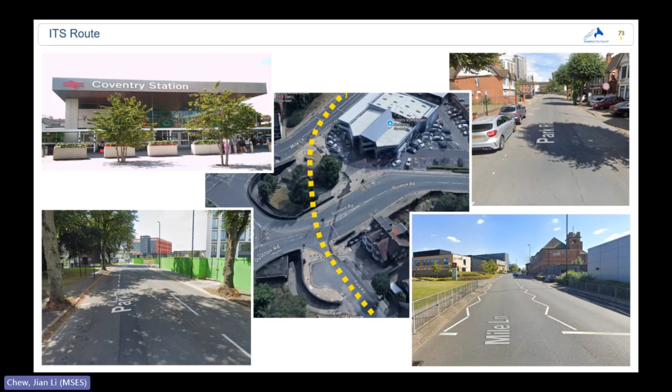Yes, this is the route that sees a lot of environments. As I said, you would probably have walked along that route coming here from the train station. And the vision is that, hopefully, we get to build the first route.

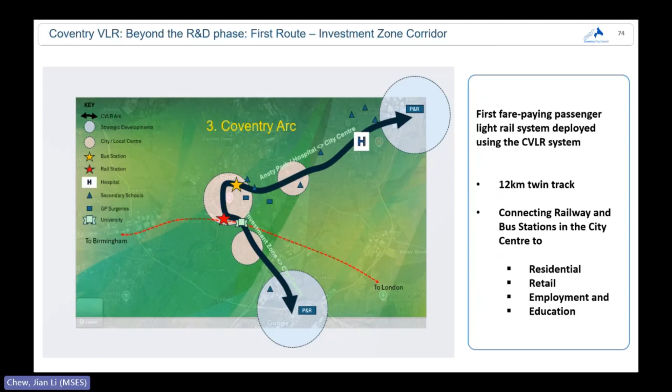Beyond the first route in Coventry, we are actively working and getting interest, for example, with Transport for Ireland — we are planning and developing a pilot test track there. We're also working with Transport for West Midlands, looking at putting a test section there, and similarly with Sheffield, there is a lot of interest. Hopefully we'll get there, especially if any of you are willing to help us — we're always willing to hear ideas. So that was all.

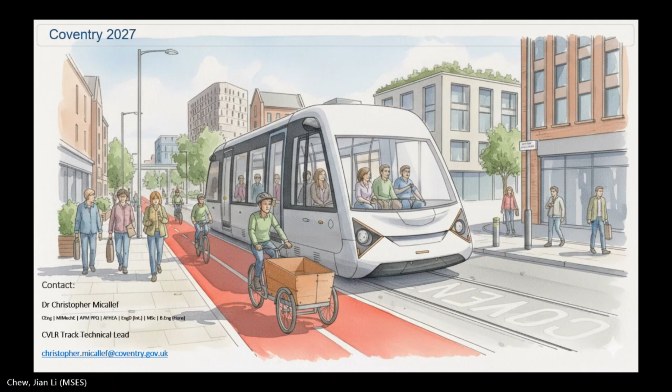When are they planning on starting this?

We're currently in detailed design phase, and working with the contractor to define the best way of delivering this. We're in consultation with, for example, the property owners along this road — it's a mix of residential and commercial. So we're looking at what is the best way of doing this: do we get consent to close significant sections and blitz it, or do we disturb the environment for a longer period but allow much easier access to all of it?

It's of course a delicate balance, and we're seeing what is the best way of dealing with that. The other section is simpler in terms of stakeholder engagement, and gives us probably the opportunity to do longer sections of track, but it's always a fine balance working within a complex urban environment. We're currently in that mix of detailed design in terms of the track and exact alignment, and how to interact with that junction in the middle — there's a series of underpasses and so on, and how to build that section of track while allowing access and deciding what needs to be taken away and when. So we're still in that detail, and probably still weeks or months from having the confidence to go and start digging.

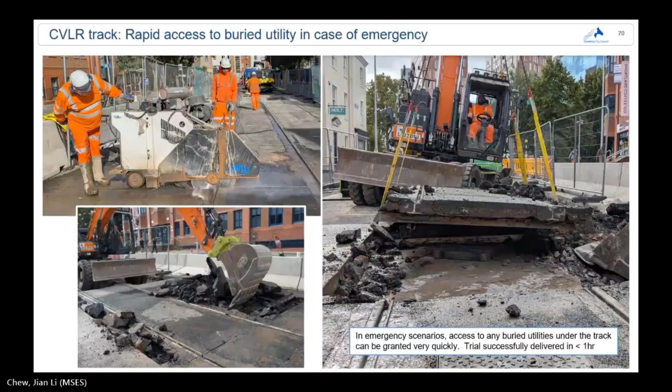So yeah, fastening system, thank you for going there. We've already carried out a demonstration of how a rail replacement could happen. It was successful, and we've already got optimization ideas on how to make this process more efficient. We were able to simply cut a channel the size of the rail, dig up that interface, that joint, exposing our fasteners. We can untie the fasteners, lift the rail up, put the new rail down, refasten, and then reinstall the interface material. So yeah, we've already carried it out.

What was the other bit of the question in terms of the fasteners? So you said the fastener system is already certified against existing standards. That's the easiest question to answer, because there are specific standards against which we were able to design and test. It's a Pandrol-supplied system, which we have certified against the A+ rating.

So the question was, the track appears to be initially fastened with adjustable fasteners - is there any subsequent securing after that? No, the rail can operate without needing any embedment. That's what A+ fastening system certification means. We are able to potentially operate once the slabs are bedded - you could operate a tram at that point without the pavement being built around the rail. The embedment will of course provide an extra degree of support for the rail, but it's not necessary for the rail to operate safely.

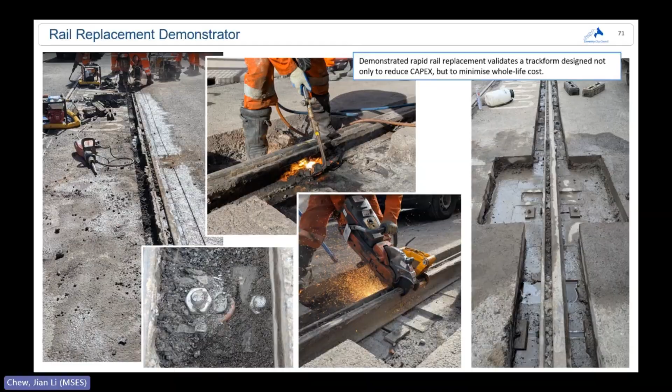Thank you very much, and you had a question, sir? On the next test route, you mentioned including junctions and switches. Does the standard slab track allow you to create those switches, or does it require a bespoke slab? You need a bespoke slab, but we're very confident of being able to carry over the same systems. Turnout sleepers tend to have very much the same principle as our slab. In fact, manufacturers themselves are very interested in working with us to come up with a universal slab to fit on the turnouts, which they can exploit beyond city level.

As you know, there's a lot of interest in prefabricating as much as possible before units arrive on site. So you can send the steel with the slab already assembled on it, and then you can just lower it down on site, bed it in place, and you're good to go. That's extremely effective.